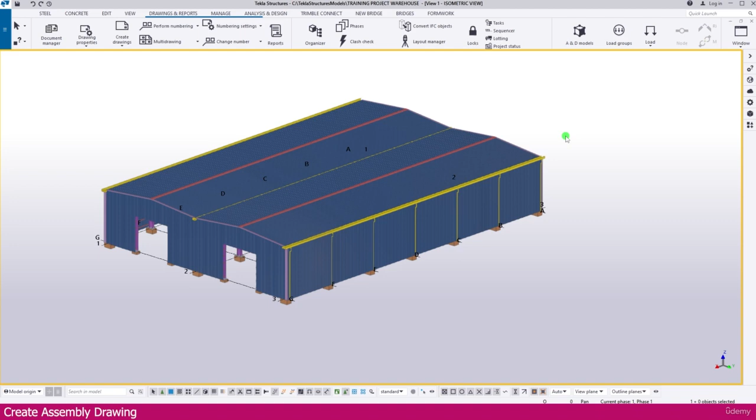To create assembly drawing, we can create one by one drawing also. Example, you can filter column or rafter, purlin, like that each and every assembly you can separately create, or you can select all the things and create the drawing also.

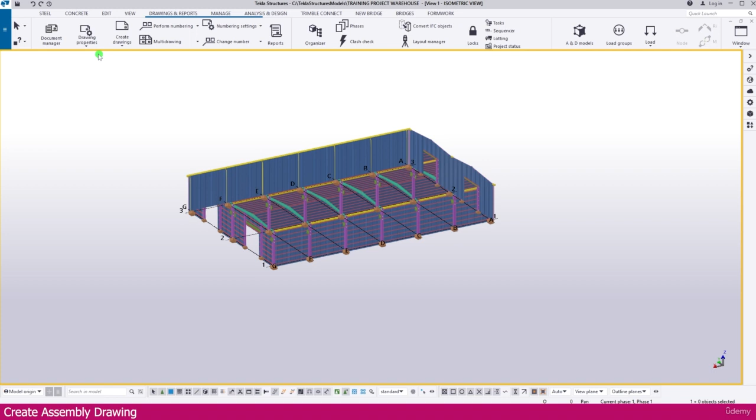I will show you one by one. I just go to drawing properties, select assembly drawing. Next I go here, select the column, and here it is parts. You can select any one. Column plus parts means the single part also will create in this. Column means you will get the column only.

Now I just show you this one. Then you will get everything here. Just keep as it is. We don't want any text here. Delete it, then apply and click OK.

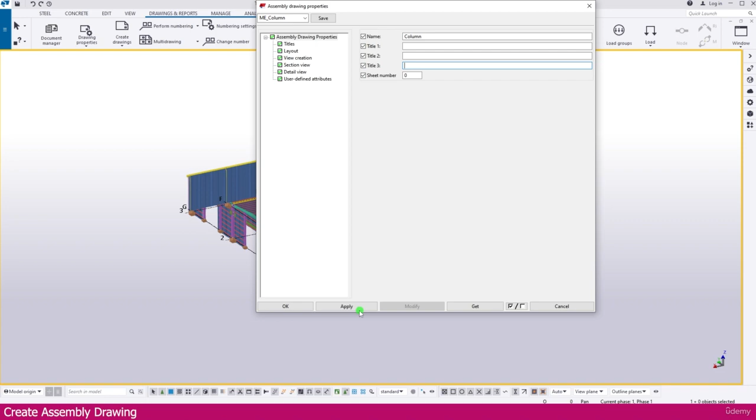Now you can select the column or filter the column. I just double click outside, then go to the filter. You can select any part. I just make it part name, make it contain. Then I click here, select from model. I just click this column.

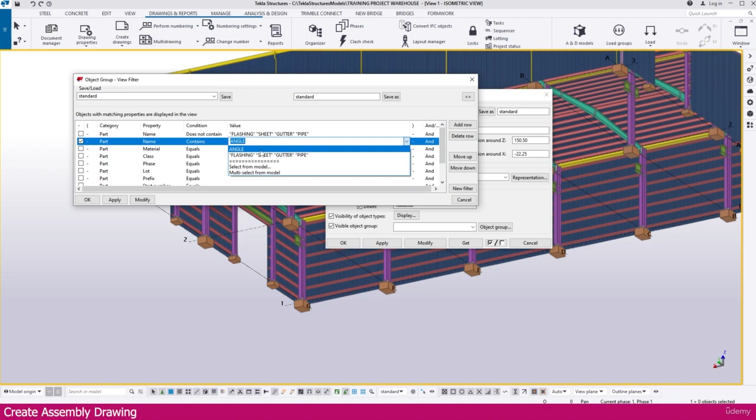Click this column, exactly we need to click the column. Select like this, now I just click. So now you can see here column. Now I just modify, you will get it here column only. Here it is, filter the column only.

Now you can select the column, close this one. Then I go to create drawing, select assembly drawing. You have to select the object, that is very important. If you didn't select it, it will not show assembly drawing.

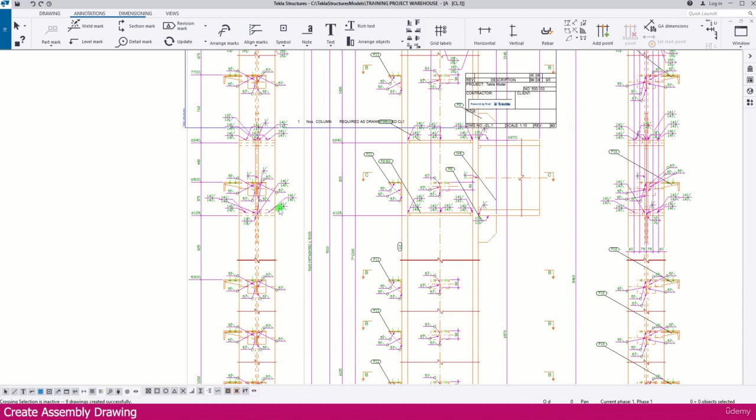Now the drawing is created. Go to the document manager, then go to assembly drawing. You can see here all the column assembly drawing. You can double click this drawing, it will open. Just once you open it, after that close this one. You can see the drawing. You will get all the welding marks and everything.

But this drawing cannot accommodate inside this drawing. Double click outside, then go to the layout. We have to check what is the drawing size. So we need to change this drawing size to A1, then modify. Now you can see you will get a little bit more space.

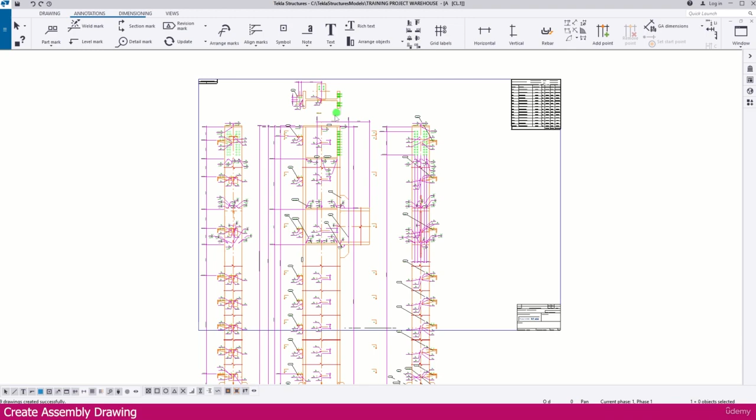Now you can select the view. If it is required, keep that required view only. If it is not required, you can delete it. We already have this view, side view, so I just delete this view. Then see here, you will get a lot of sections. Whichever section you want, you can keep that one, otherwise you can delete it.

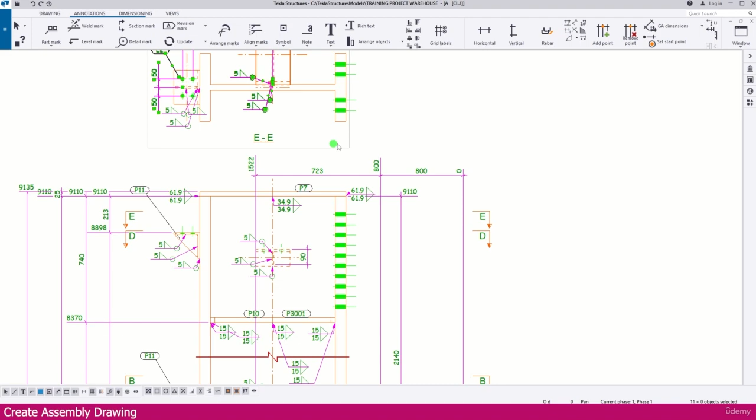This is the section view. Now just place it, select this one, drag and drop it, select this one also, drag and drop it. Now also this scale is not enough, so just double click this one. You can change the scale, cancel, select this view and double click.

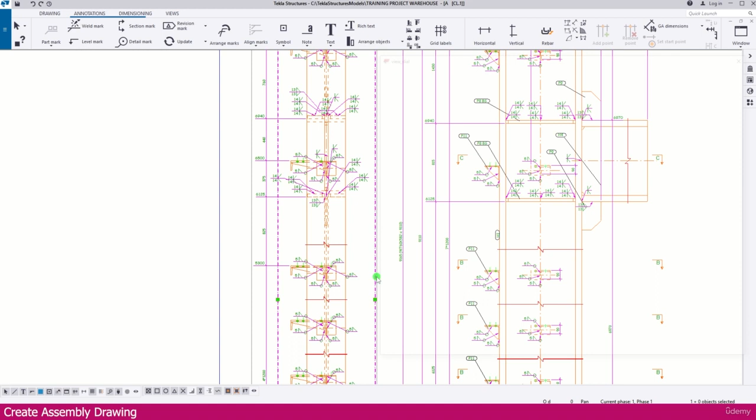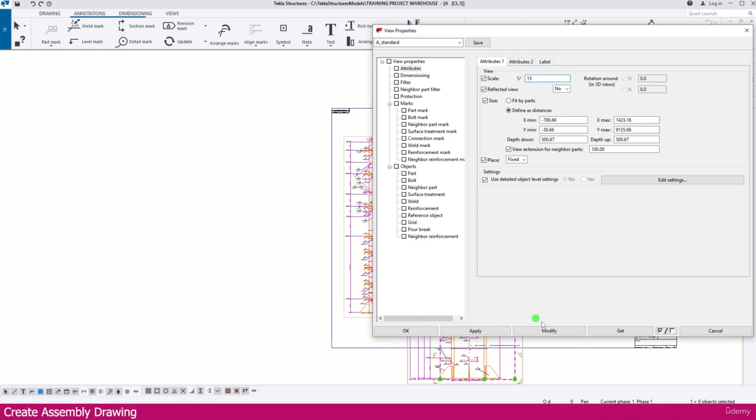Next go to the attribute, make the scale 15, then modify and click OK. Now you can see it accommodates properly inside. Similar way you can double click this also, make this scale 15, modify and click OK. Within a few seconds it will modify. Now you can accommodate this column inside here.

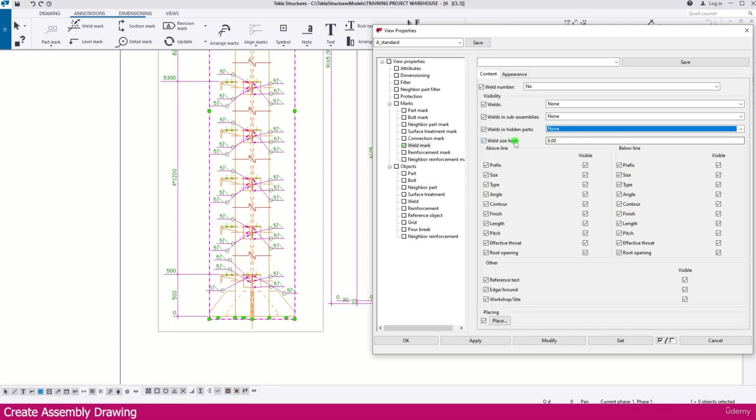You can see a lot of welding marks, everything is coming, but we don't want all the welding marks. You can click this view, then go to the view properties. Here in this mark, you can see weld mark. Then go here, make it none, select here also none, keep weld size as it is, then modify. You can see all the weld marks are removed.

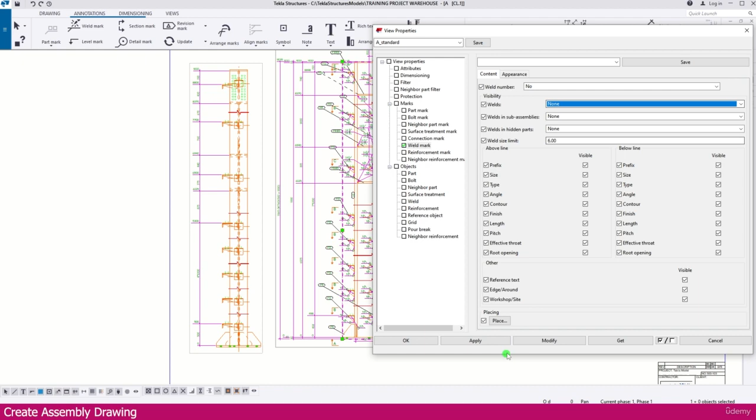Similar way you can make it here also. Double click this one, then go to the weld mark, make it none. See here, if you need site weld only, you can select that one. If shop weld only is required, you can select this one, you will get shop weld only. If you need both, you can select both, but we don't want anything, so just keep it none, then modify and click OK.

It is cleared. This P5 means that is the part mark. You can click here, click and drag and drop it wherever you want. Select this one, press the shift key on your keyboard, you can place it wherever you want, like this.

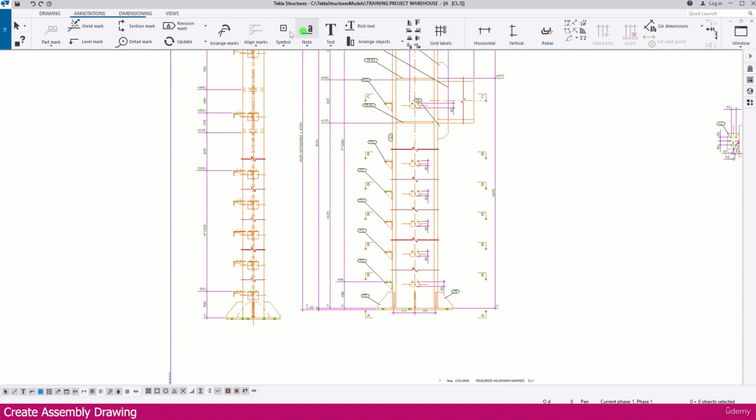Here also you can create dimensions, you can use these annotations, and you can create the detail sections. Everything is possible here. Then dimensions, everything you can create. See here, this dimension is coming like this.

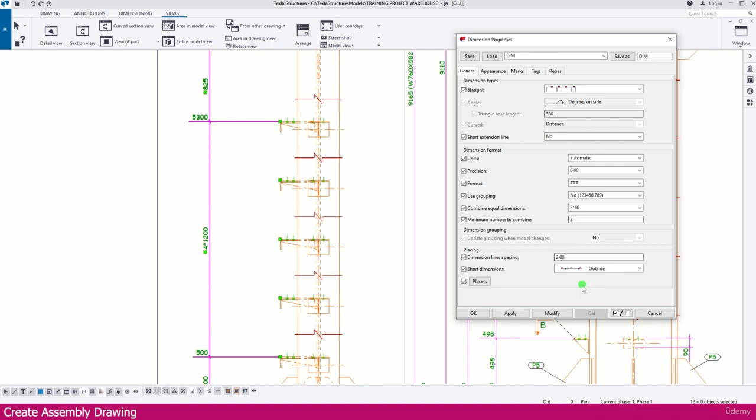You can double click this one. See here, dimension types - if you click here, few types are available. This is normal, you can select this one, modify, and you will get it like this. If you need it like this, select this one, you will get it like this. Or if you need both, you can do like this. So whichever type you want, you can select that one, but most commonly this type of dimension is used. Then all the dimensions need to follow the same style.

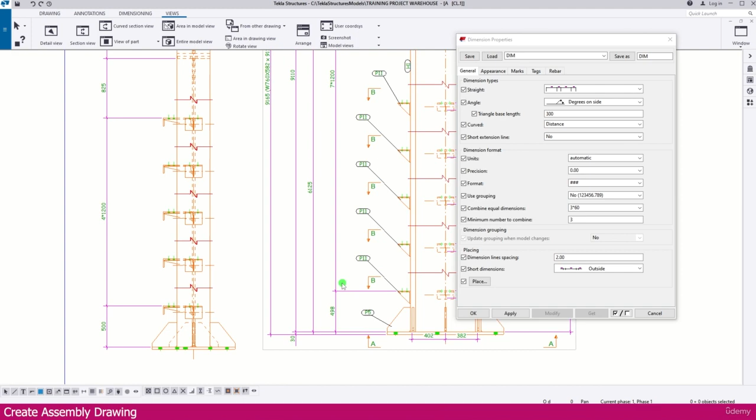Just double click this one, so you will get these properties. Just select the whole drawing, then if you modify it, you will get these properties only. Now you can see here, everything we made, these properties are the only ones available for the dimension. Similar way, you can select any one and change the properties. Once you change, you can select all. If you modify, everything will update with that properties.

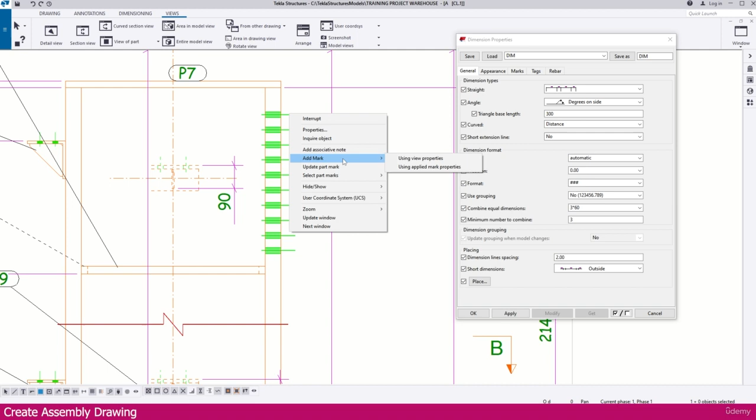Then if you need to make any more dimensions, you can make it. Then you can select this one. If you want to make this marking, you can apply mark properties. You will get it this size. Double click this one, you can make changes. If you need to add text, everything you can add.

This is dia 22, the diameter of this hole. If you need to make the text, I just make it text here, dia. Modify - you can select this one, move up, then modify, you will get it like this, dia. I just remove this one.

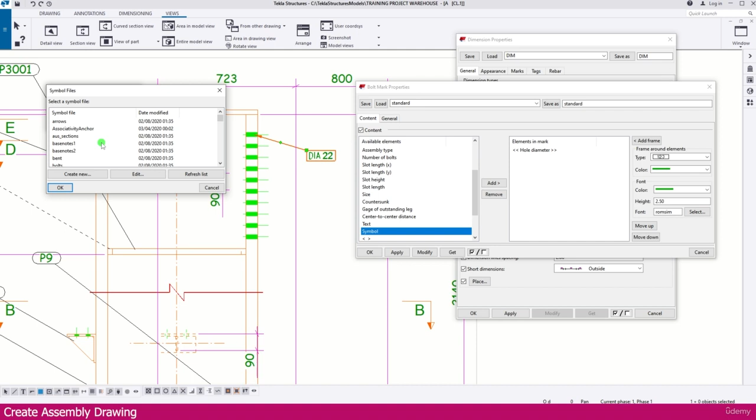If you need to make the dia symbol, just go to the symbol, then go to select, you will get the dia symbol. Just make it here dia, then click OK, then OK, then select this one, move up, then modify, you will get the dia symbol and all. So like that, you can use a lot of things available here.

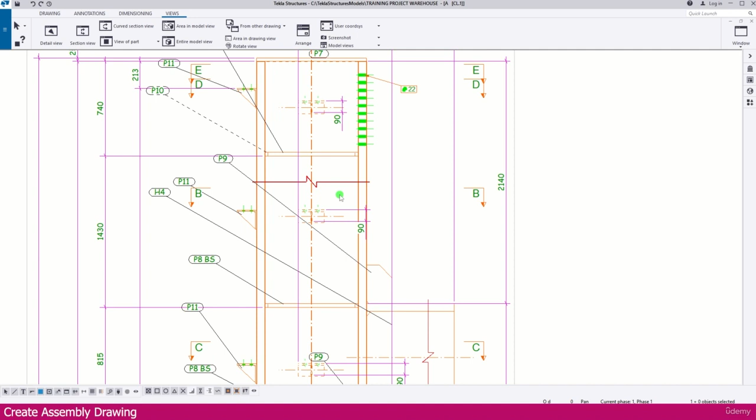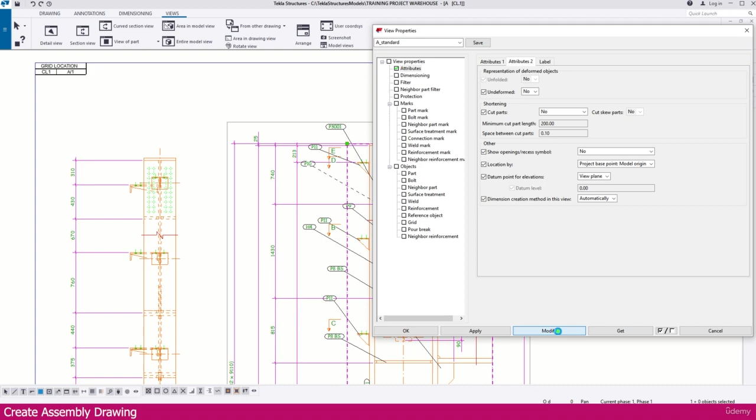This all you can use to mark this hole. Then you can see here, you will get a symbol like this, because it will break - this area we don't have any other connections, so we don't want to show that much length, that's why it's coming like this. If you don't want this, you can select this view, then double click this view properties. Then just go to attribute, select cut part, make it here no, and modify.

Now you can see, without any cut part, you will get the whole length. After that, you can change the scale to perfectly accommodate inside. Now just make it at 18 scale. Now I modify and click OK. It will accommodate properly. Similar way you have to change here also.

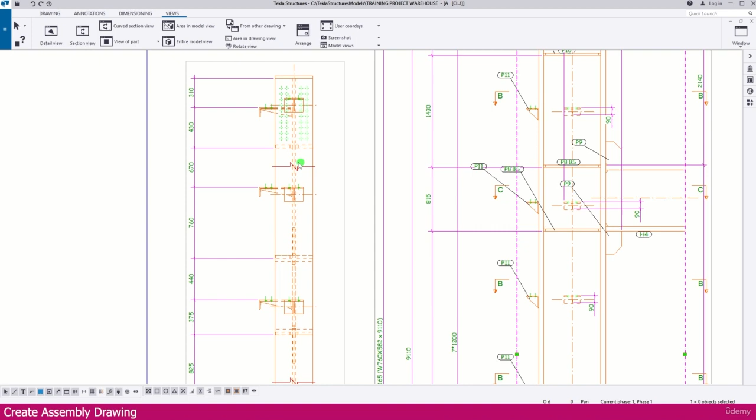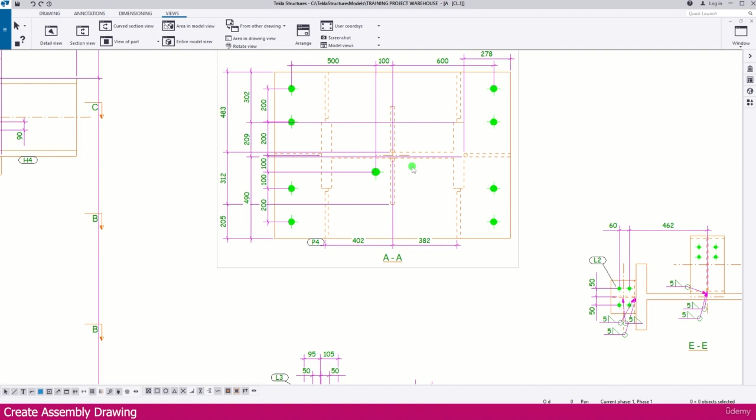You can see here also available. Similar way you have to change here. Then if you make any modification in the model, it automatically updates here also. Then you can see here, this all the views. You can just click here, drag and drop it inside. Just click this one, drag and drop it inside. In that also you can study very clearly which one you require, which one not required.

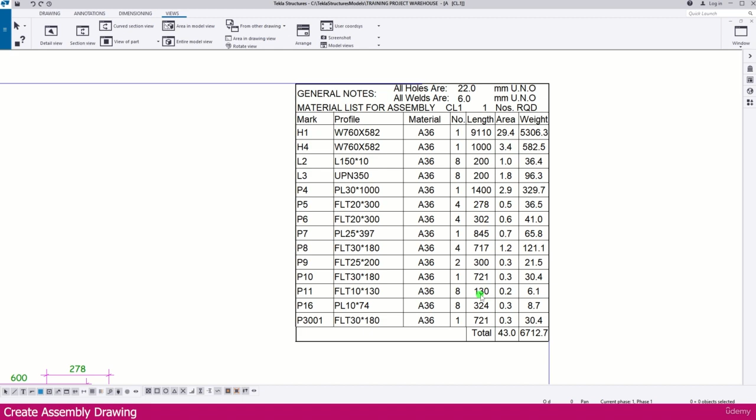If you need to give any additional information, everything you can use. Here you will get the material list - this is the mark number, profile, material, everything you will get. And here it is the title block. How to do this title block, material list template, everything is available in Tekla Structures 2020 lectures. This is the way you can create this kind of assembly drawing.

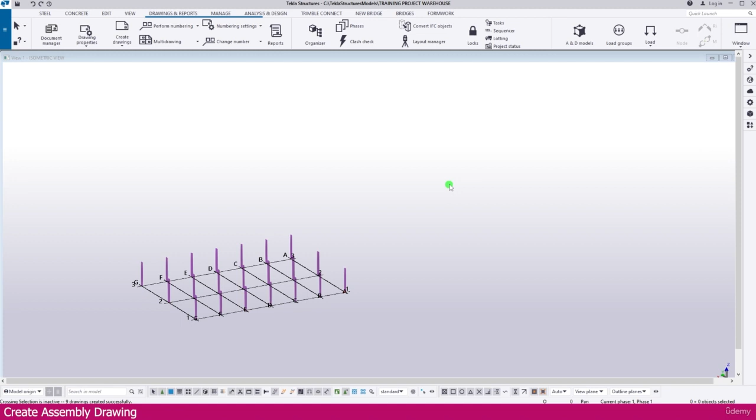Now we created - once you filter, after that we created, or you can double click and just remove this filter. Now you can select all the model, then go to create drawing, select here assembly drawing, and create the assembly drawing - the whole assembly drawing it will create. You can one by one edit and change, everything is possible. So this is the way you can create assembly drawing.